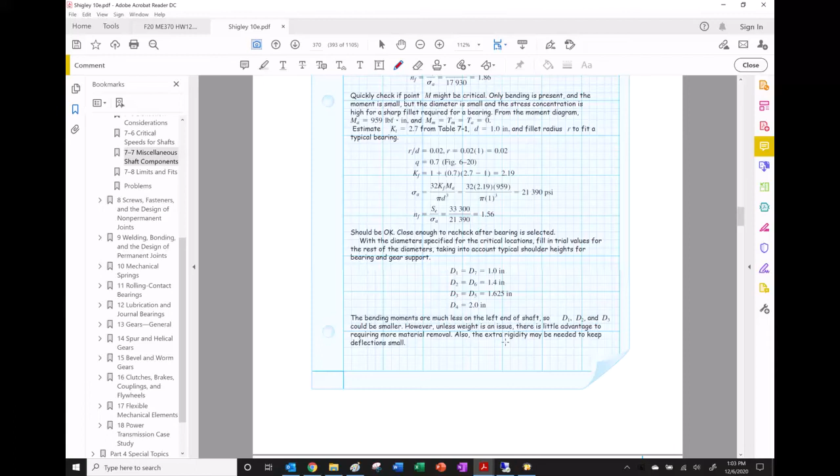Alright, here's a brief video on making the drawings for this homework project. I'm going to base it on example 7.2 in the book. We're making it slightly different because I'm not using retaining rings on this — I didn't feel like covering that.

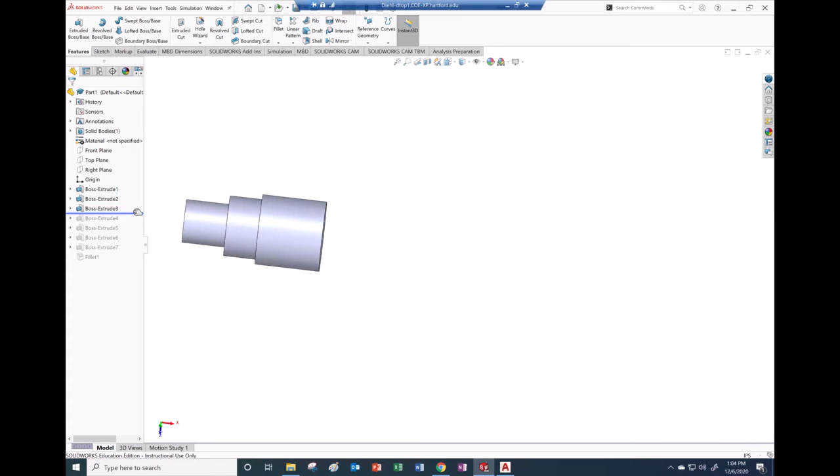So I've made it already in SolidWorks here. I didn't bother with the technique I had alluded to, where I made a bunch of planes. I just started on the right plane and built up one section at a time. But you get the idea. Then I added fillets based on what was in the book, which I think used inches.

Of course, our project is in millimeters. But you can see that the fillet is pretty small right here — they used a 0.02.

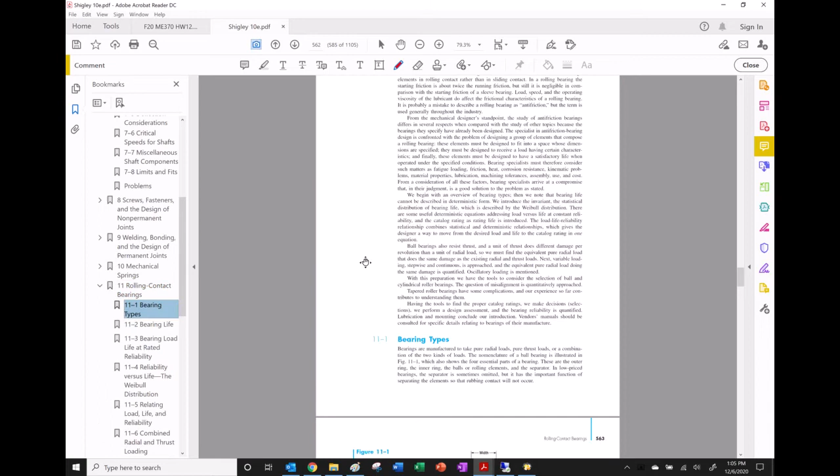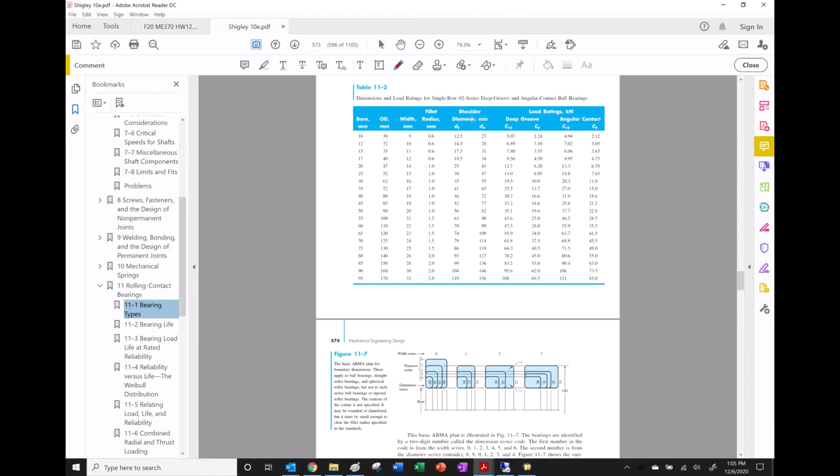And for the bearings, like I said, look up the table here — I think it's table 11.1, or maybe 11.2. I think we have this table right here somewhere. Yeah, there you go. Or is it 11.2? I think it's 11.2, right?

It had these bearings in it, and unfortunately they're in metric right here, and I don't feel like doing the conversion. But right here is a 25 millimeter, which is the same as a 1 inch diameter — 1 inch is 25 millimeters.

Anyway, if you take a look at the angular contact bearing, the C10 rating is 14.8, in kilonewtons. I think it's going to be way larger than... let's see, we've got to go back to this. Yeah, this is running, this is great, isn't it?

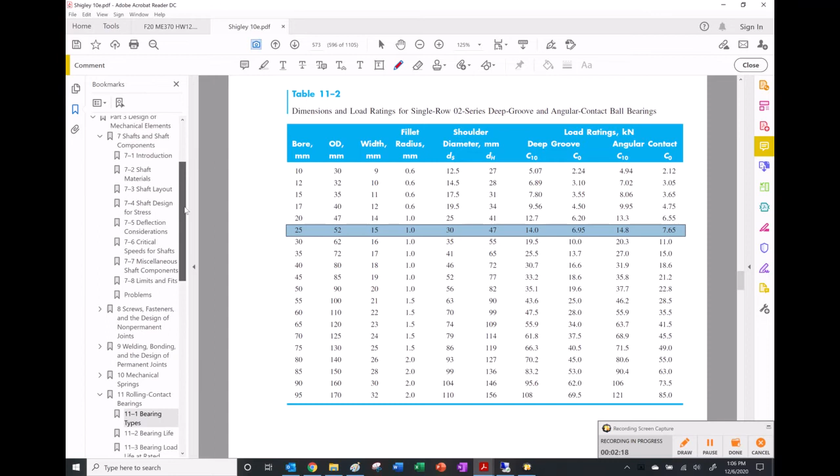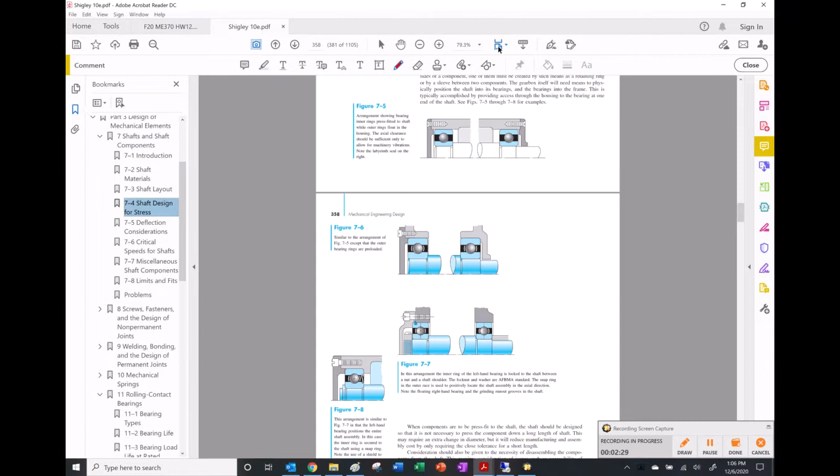Oh boy, let's see — shaft design for stress. I think once you did the statics, which I'm not sure exactly where they're done in this problem, but I think they're shown, right?

If you go back and look at the forces — these two forces — and get the resultant from that, it's the square root of 115 squared plus 356.7 squared. If you turn that into kilonewtons, I'm sure this would be way smaller than the bearing rating.

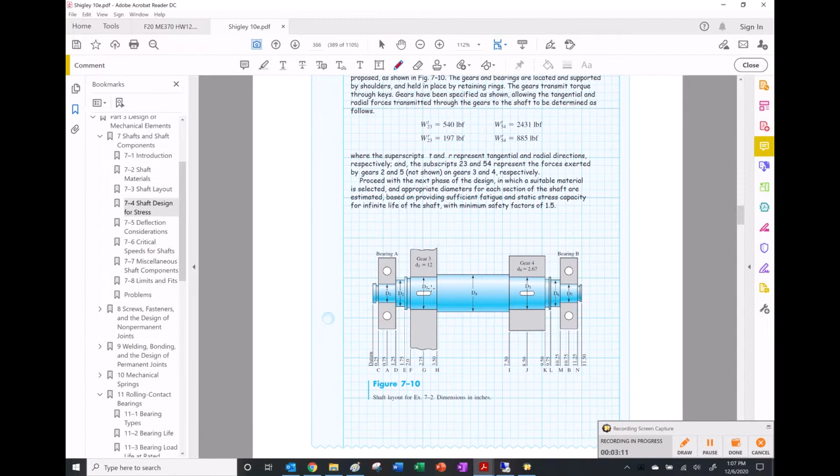But the 1 inch diameter really got chosen based on... trying to get the words out... based on the ratio between D1 and D2 right here.

So anyway, going back to my drawing, I'm going to create a drawing out of this. I think I have to save this first in order to get it in there.

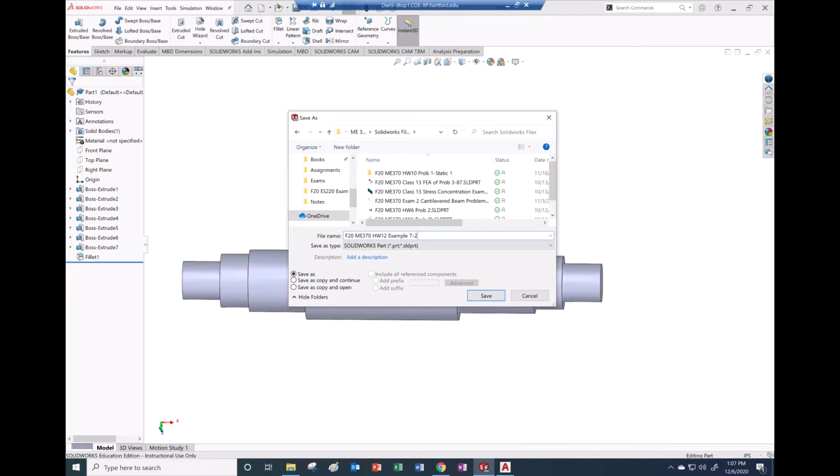Let's see, I'm going to go up to my directory here — I have one called SolidWorks files. I'll go F20, ME370, homework 12, example 7-2. There we go. I'm telling myself this so in the future when I go to look for this file again, I can find it.

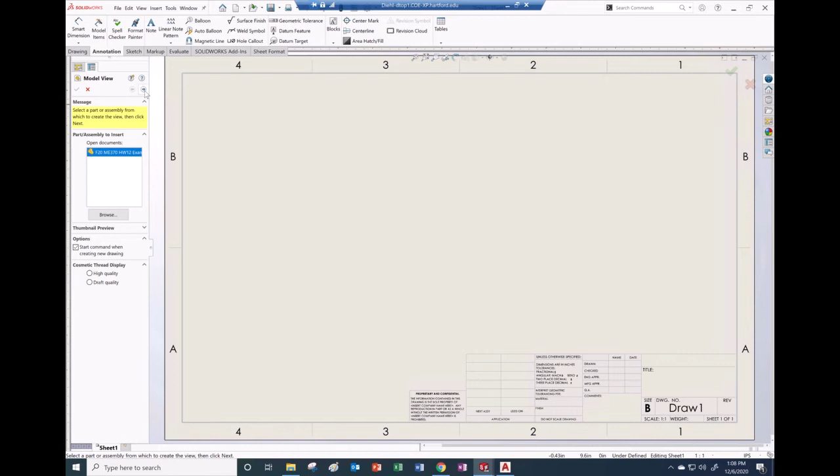Okay, so I want to create a new drawing. I told you to use B size, which is 11 by 17. It's already open in there, so I can just stick the file in.

We really only need one view — the front view, I guess — you don't need the other views. And this doesn't really use the paper all that well, so I will use a custom scale.

I think the better way to do this — I keep forgetting — is to go to sheet and go to properties. Is that right? Yeah, and we could change what the default scale is. Let's make the default 1:1 and apply the changes.

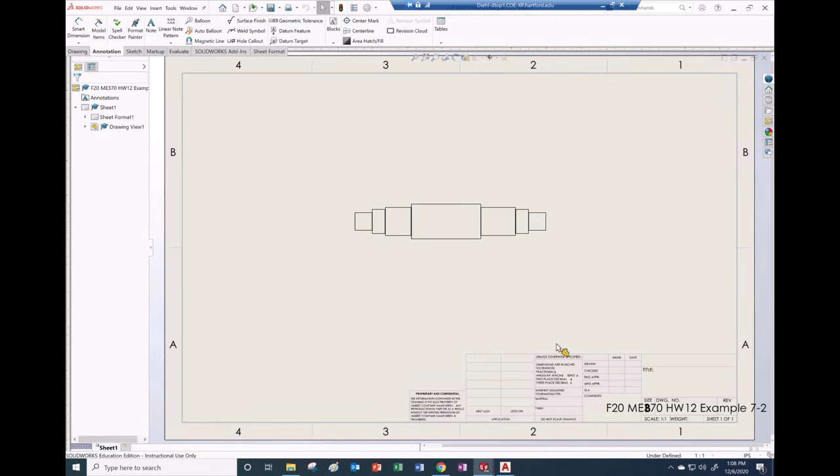I think we might need to rebuild. It says 1 to 1, but that doesn't look like it changed. Oh okay, use sheet scale. There you go, boom. All right, but you might want to change that for yours — you might need to make it bigger to fit into things.

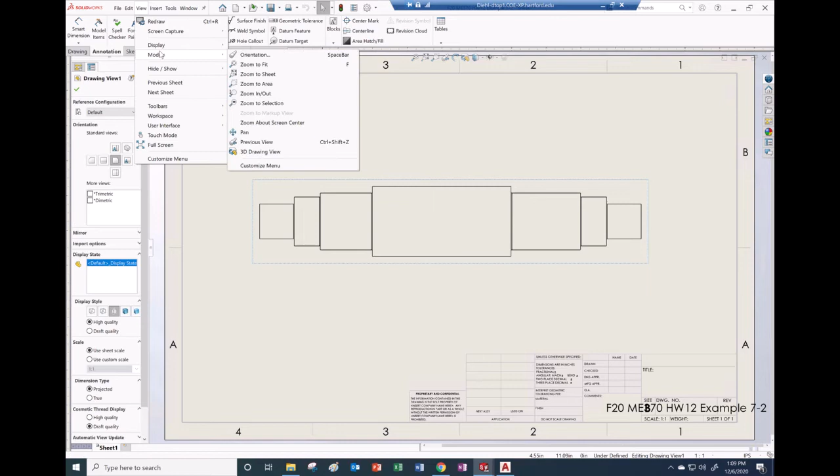There's something in here I like to get rid of because I don't like the way it looks. I go up to display and get rid of — sometimes I put tangent edges with font, or get rid of the tangent edges that are part of that — because you can't really see that. Now you can see the fillets in there, but you can't really see that line. It doesn't really appear in a real shaft.

So let's see, I think I might have to mess around with some stuff here. I was asked about how I put X's right there. I probably shouldn't even have done that, but I'll show you how I did it — I think it was Jason who was asking.

I just went into my sketch right there, and I think I might have had to cheat and go to this line right there instead. And then I did it again here with the center line.

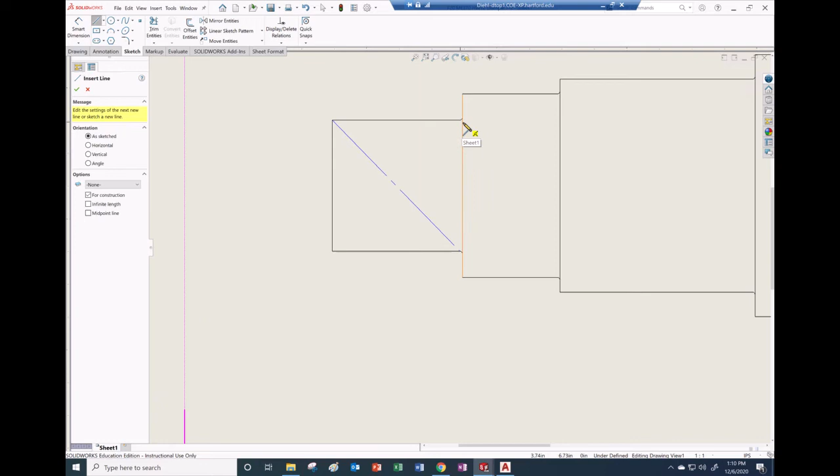This is not necessary to do. I mean, you could convey the thing without doing this, but I liked the way that it looked. So that's what I decided to do.

I think I might need to be careful, if I was going to use this for dimension, because since I took this off the bottom of the fillet instead of doing it all the way, in reality that should be right there, right? Otherwise the center of this is not going to be in the correct spot when you go to make the dimensions onto the thing.

But I think maybe I have just caused more problems by even showing that on my original drawing. I just like the way that it looked, to tell you the truth.

I'm having a hard time getting this thing to grab. But you can see, this is just a graphical thing, right? It's not really a common thing to have those X's on there, but I figured I would show you how to do it. It looks kind of nice.

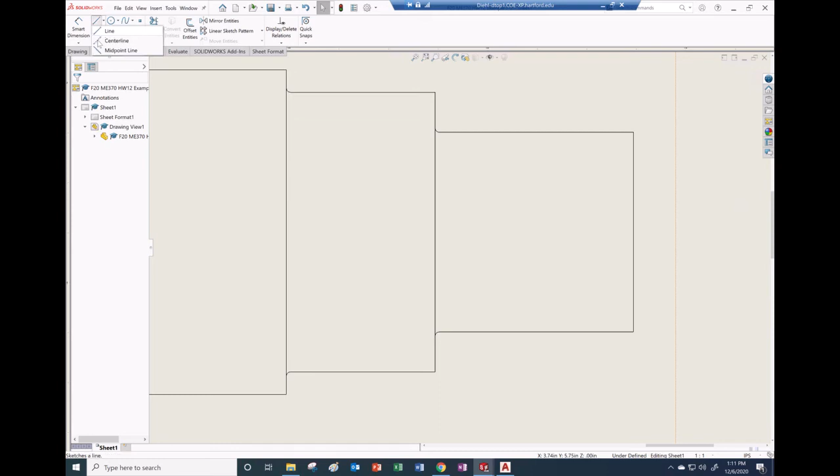A lot of times people want to know where the center of the bearing is. Let's see if I can get this to work, it's not doing the automatic thing. Sometimes you have to touch it onto there. I think that's going to be right.

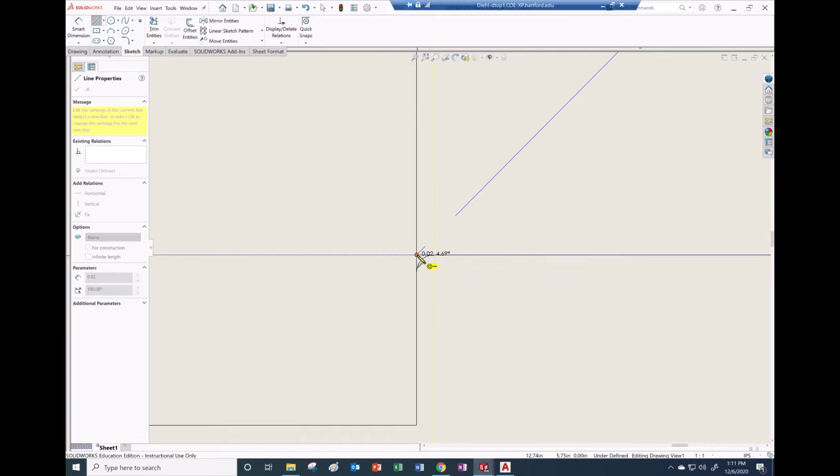Let me double check. See, what I could do if I really wanted to mess with things is I could go from here to there, and then force that to be horizontal, so that it's small enough that nobody's going to even notice it's there, but it's going to force the thing to be where I intended it to be.

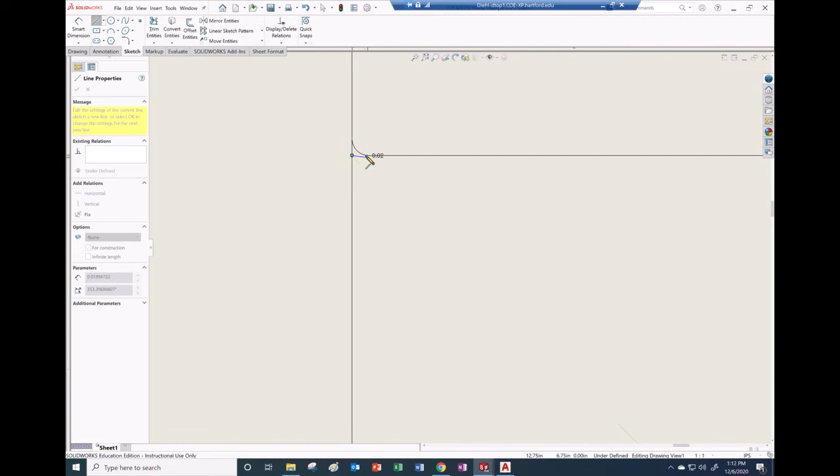So when I go to make a dimension off of it, right, I could have just done that, yeah. And I think that's going to be horizontal. I think it's going to be in the right spot.

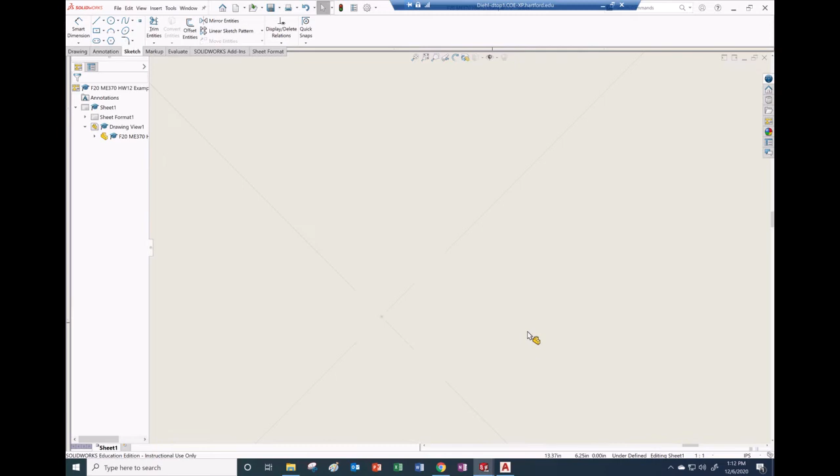When I go to actually make a dimension on this, it'd be nice if those crossed at the same spot right in there. But anyway, I'll go ahead and put a point right in there. It's going to be really small, so you won't be able to see that point placed onto the midpoint right there. But I believe that's going to give me the right dimension. So that right there is a better thing to be making our dimension off of.

So when we go to make a dimension onto this thing, we have 10 inches, right? And that's like the critical dimension because that's how the thing gets put into the machine.

And then when you go to have other dimensions, you want to be careful not to, you might be tempted to do a dimension right here, but of course the fillet's there. So you got to be careful when you're putting the dimension on that you actually go to the correct edge.

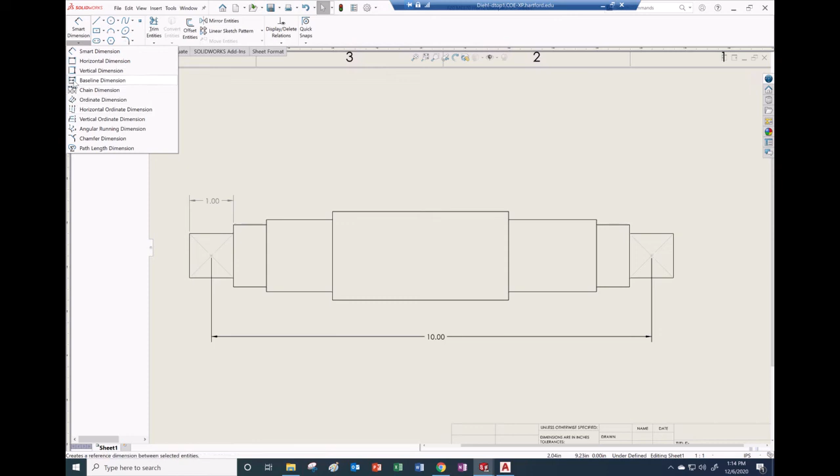Does it know to do this? No, I guess there's another dimensioning thing in here. I think it's horizontal ordinate dimension. You could do that, I think. There might be baseline dimensions, you could use some of these other features. I'm just mentioning them, I don't remember how to use all of them, so I'm not going to right here.

Because I could figure it out, but I'm in the middle of making the video and I don't want to stop and figure the thing out just right now, but this is going to be good enough.

And I'm going to go ahead and break one of the rules that you usually have for dimensioning, and I'm going to go ahead and include all the dimensions in there. A lot of times you don't, but I guess technically I think I have enough information now to be able to build it.

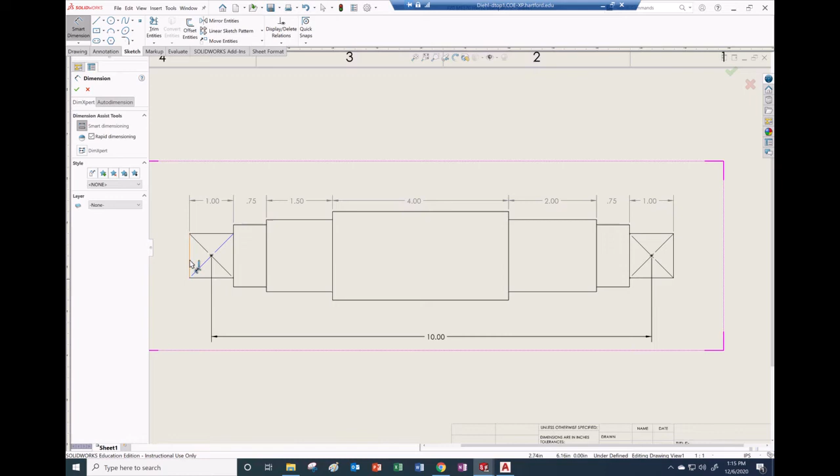And then we want the diameters in there, right? So, right here, put that diameter in here. I don't like the fact that it's going over to the right. It would look better to me if it went over to the left, but I'm gonna leave it right there. And then let's see, go to this.

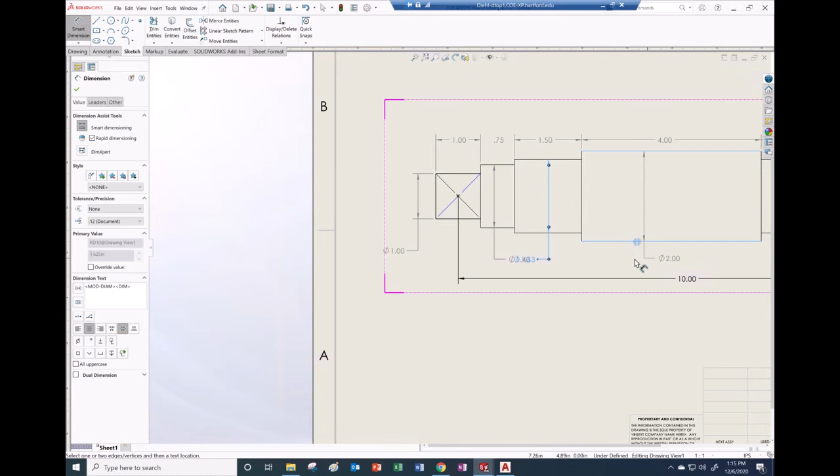And I think we're right here. Oh, well, look at those guys that cross over. I better fix that over there.

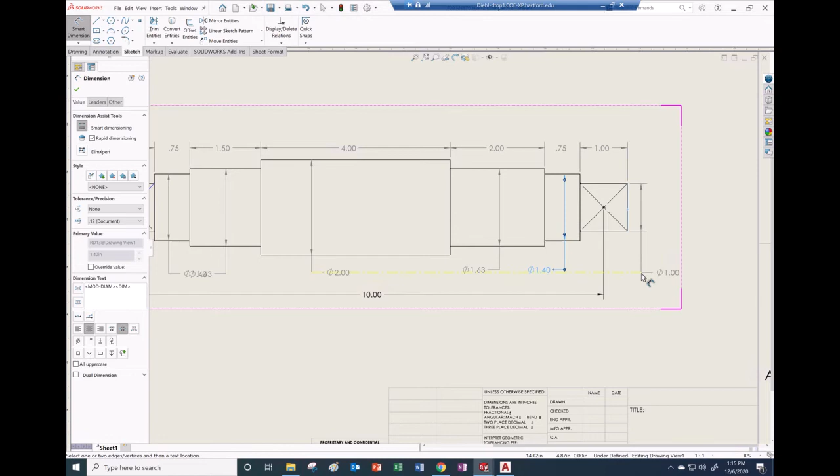All right. Let's see, let me fix this guy. I don't know why he decided to do that. Let me go fix that guy. No. Oh. Dang. Come on.

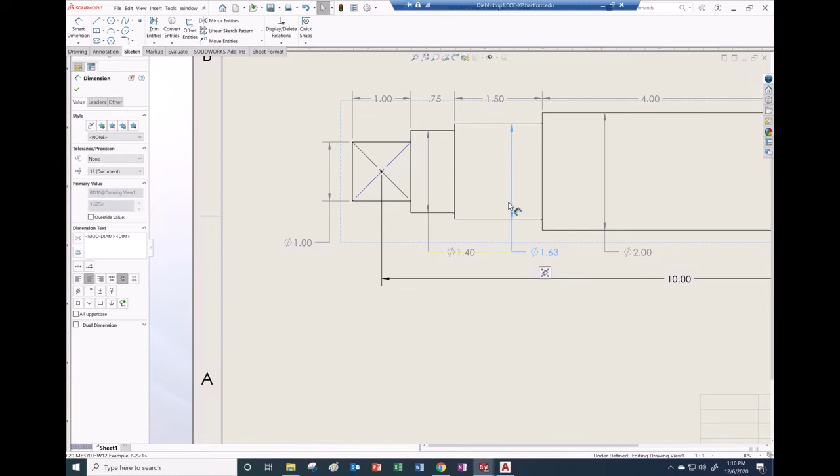I think if I click on that, is where I click on that. Yeah, there you go. All right. Yeah, click on that. Got him to go over to the direction. Yeah, that looks okay, looks pretty good.

Also, okay, so if you want to do a call out, an annotation here, where are we at here? Datum feature, datum here, balloon, linear pattern. Let's see, I think it's a note.

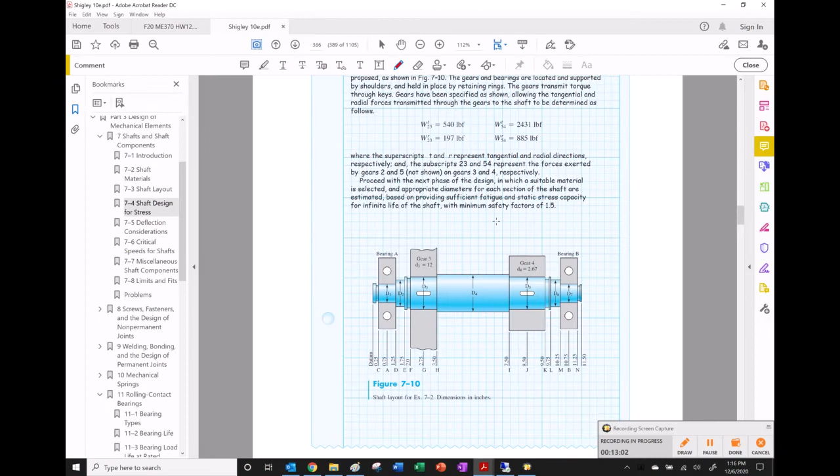I think you come in here and let's see. I'll pick this note right here, and then I will write in capital letters, keyway. Did it tell us what size the keyway was in this? I don't know if it ever actually says what size the keyway is.

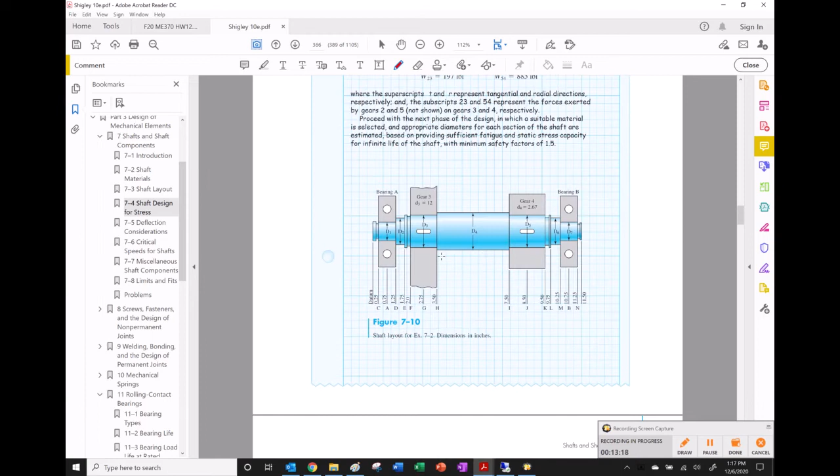I'm not going to read this just now, but what I can do is that I know in the area where there is a keyway, that's going to be D3, and at the end they summarize the diameters, and D3 is 1.625.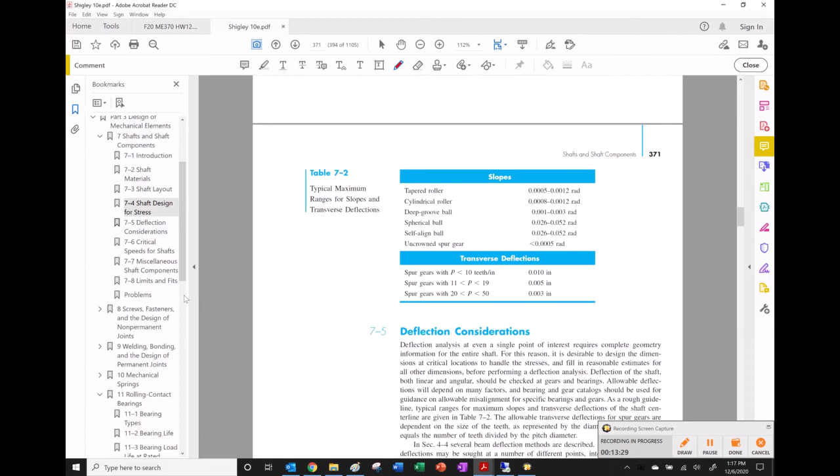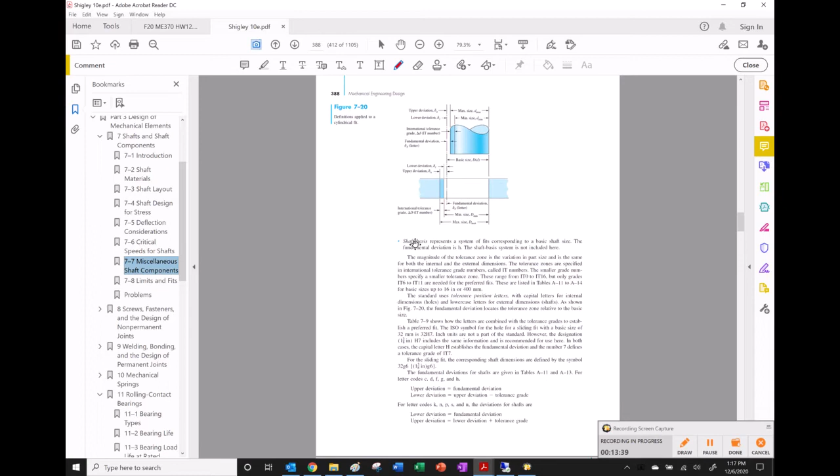So I think that's going to be miscellaneous shaft components, and I tell you somewhere there's a keyway, don't I? No, I think it's table 7.6. Oh yeah, there it is.

All right, so since this is 1.625, which is 1 5/8, right? That would fall under this category, right? Am I right about that? 5/8, yeah, 3/8, and yeah, okay.

And so that's going to have a keyway if we were going to make a square key, and let's go with a square key and have it as 3/8, right? So 3/8 by 3/8 keyway.

So maybe I guess I'm going to go here, 3/8 inch. I usually use lowercase for an x right there. 3/8 inch keyway.

And you could do it again over here, right? And I kind of wish that would go over. I don't like crossing the line, but that's the best I can do right here. Whoops, dang, I wish I had, I meant to. Okay, well, maybe I'll put it down there and then delete it. There you go. Oh, come on.

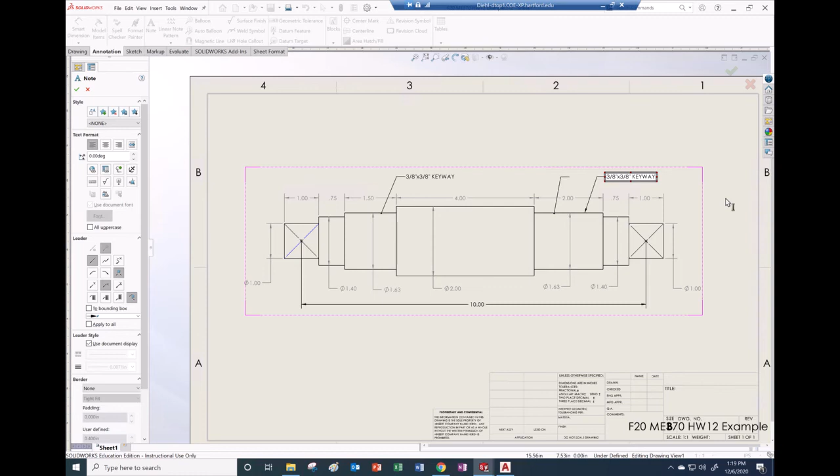All right, I guess I'll be lazy. Somehow I could have saved myself a little time. Just make the video a little longer. Except spelled right away, okay. So you don't actually have to draw, excuse me, the keyway. Because for one thing, actually it kind of messes the thing up a little bit, and it's kind of weird.

They gave me an arrow here, but a dot right there. I guess they think I didn't go to the surface enough. Yeah, okay, if it's on the surface, it'll give an arrow, but if it's on the edge, but if it's on the piece right there, it goes to a dot. That's interesting, kind of like this arrow better.

Gonna hover right over there. There you go. Now don't forget to change the sheet.

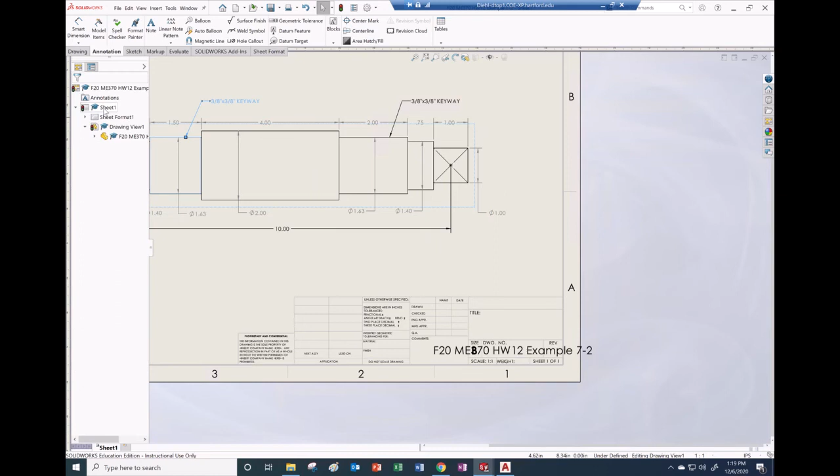So you want to edit sheet format and put all your stuff in here, right? You know, I like this. This is where we would put the company name, but we went to, you're going to the University of Hartford, right? University. Well, spell it right though.

University of Hartford. And that doesn't fit, so let's make it, I think a 16 fits. No, 14 font. There you go.

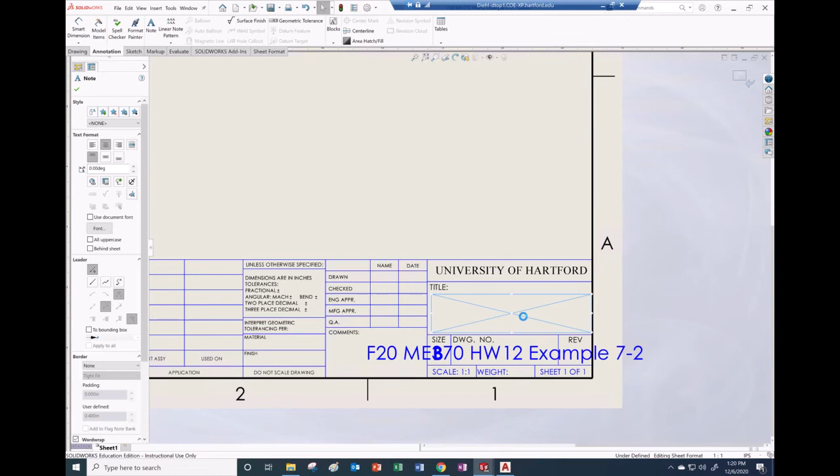Fits pretty well. Make sure you put your name of the project, right? So we might want to, I'm going to put, I like to always say what year it is because I teach this many years. So, and the course number is, and

Project, except spell, wow, doing great today. Project example, and it didn't fit for some reason, and it's not being centered for some reason.

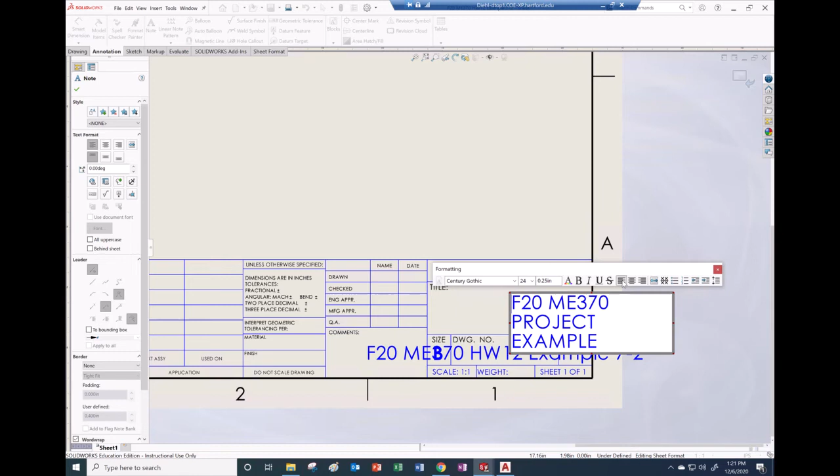I don't get that. Why aren't you centered? Why are you not centered? Oh, that's what it meant by centered. Okay, I don't know why that's not centered. That's really weird. I don't get it, all the other stuff is centered. Why are you doing this?

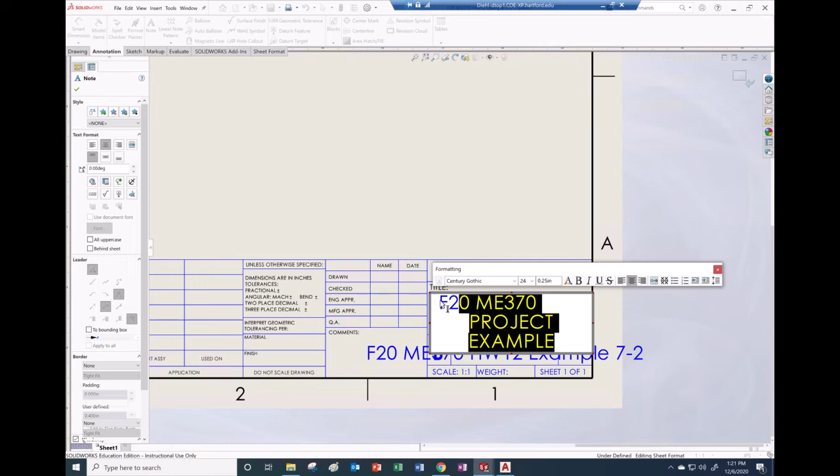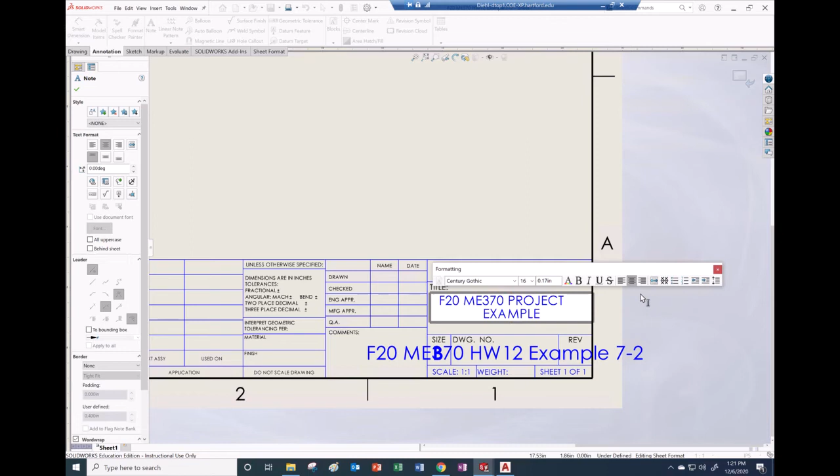All right, maybe let's just change the font down to, there you go. Okay, that looks closer to being centered. I don't quite understand why is that doing that. All right, anyway, and then you know, this doesn't fit, so we want to make sure that we go down to that.

And I think this one, do we control it with this, or do we? I think we have to control it on here. Let's see, does it go? Does 12 fit? Not quite. Make it 10.

Oh, 10 doesn't fit either. 9, yeah, I guess 9 fits. You could just change what the drawing number is, right?

The scale is correct. You might want to put in what the weight is, enter whatever the weight is, because you do know the thing, right? Make sure you put your name on it. That's really important, huh?

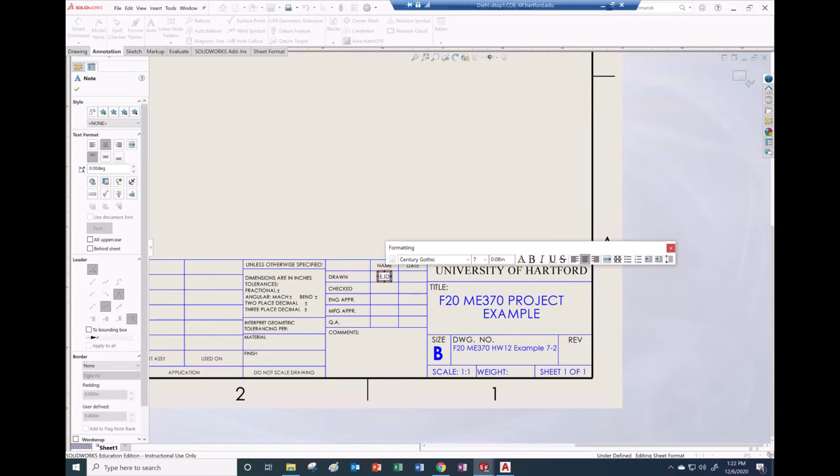EJD, generally we just use initials, at least we did in my company. And whatever today is, 12/6/20, keeping track of the stuff.

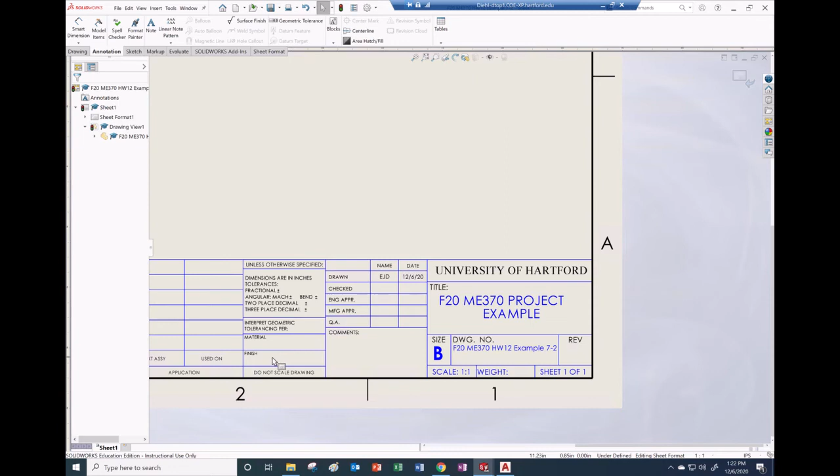Material, we should probably put what the material is. We don't really have the finish, and we don't have the tolerances and that kind of thing. If you're in millimeters, you should change what that thing is, right? I usually get rid of some of this other stuff over here, but it's not hurting anything, so we can just leave it.

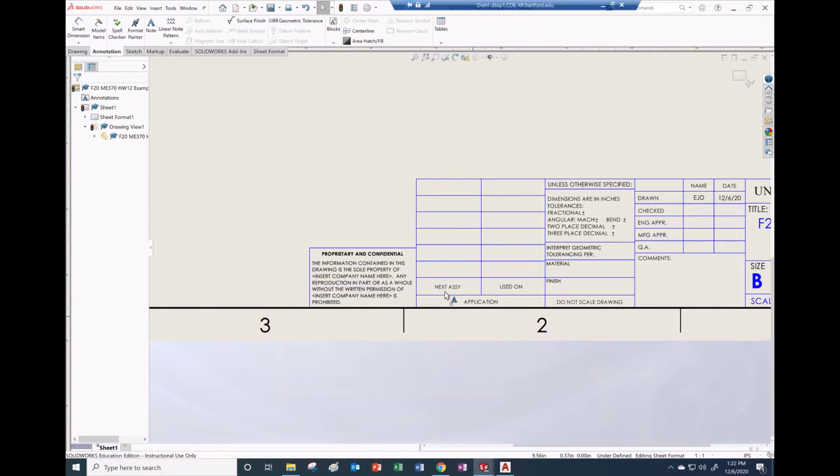So there you go. Now, if you want to print this thing out, by the way, you didn't have to do this thing here, all right, I just emphasize that. You could dimension it in other ways, just as long as you effectively communicate it so it could be built.

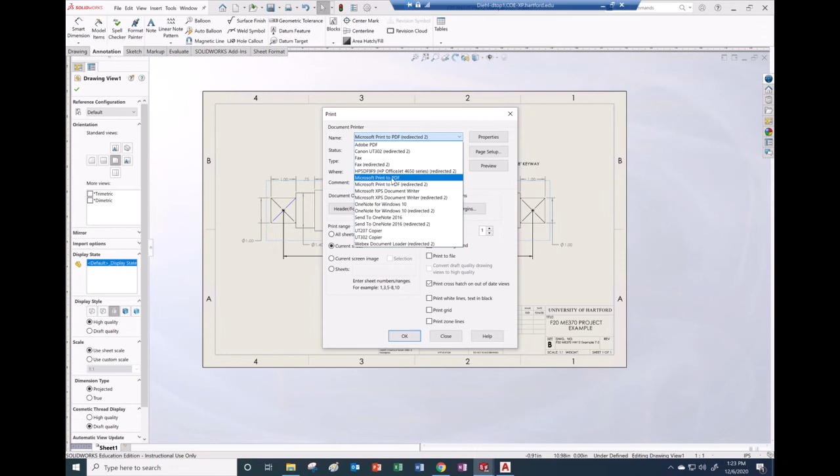So if we want to print this, that's a good idea because some people have a hard time with this. We want to print, I have a print to PDF right here, but we also have Microsoft Print. Make sure you go into properties here, and then you're going to have to go to advanced.

Change the page size to tabloid and hit OK. Make sure you do a print preview, and yes, we got everything going on right here. Now we could just hit print. Okay, hit print, maybe that's the one. Okay, there you go, dummy.

All right, plot that thing out and put this into the correct place. I'll put it into assignments for this one, and I'll write example, except without caps. Example. Kaboom.

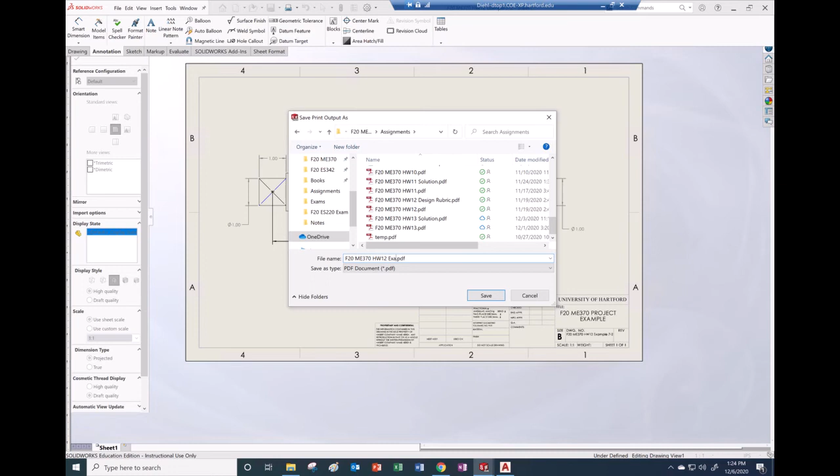Now I also have Adobe on here, so I could have also used the PDF there. Now, I did say that I was going to show the AutoCAD side of this, so I'm going to start a new drawing.

No, I didn't want to do that. I want to come over to homework. And I created a template down here for you, and so I'll open that up.

Okay, so what you want to do, this is called model space. I don't know if that was the way that you learned your stuff in ES220, but this is model space, and if you go to this right here, this is called paper space. Paper space has what's called a viewport, and this viewport is a window into model space.

So let me quickly, briefly draw this thing out. Hopefully I can do it without taking up too much of your time. I already have, I'm going to make some layers here, but I want to make a layer that's specific for the drawing. So I create a shaft layer, and maybe I'll go blue, boom.

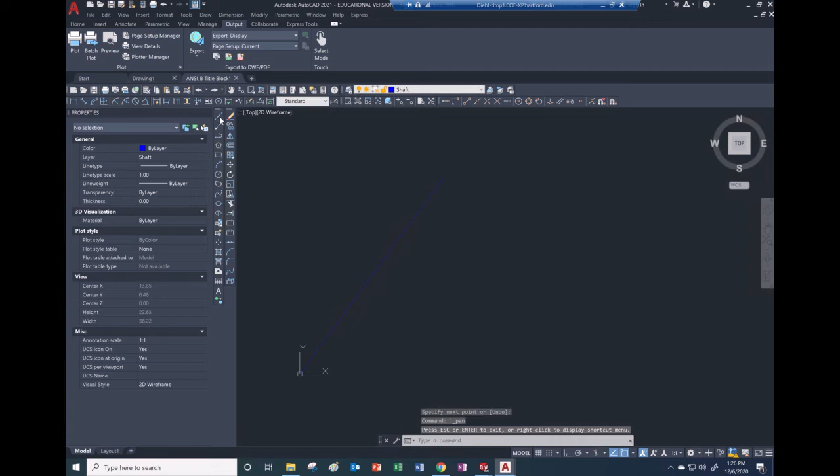And so I'll start another line. I just want to go right to 0, and I'll have my ortho on. And this thing is only about 10 inches, so I'll estimate somewhere right around there. Boom. Get rid of this line.

Make this line, it is going to be a center line, so I'm going to keep this as center. Oh, I don't have one. Okay, I need to create a new layer for center. So we'll create a layer for center.

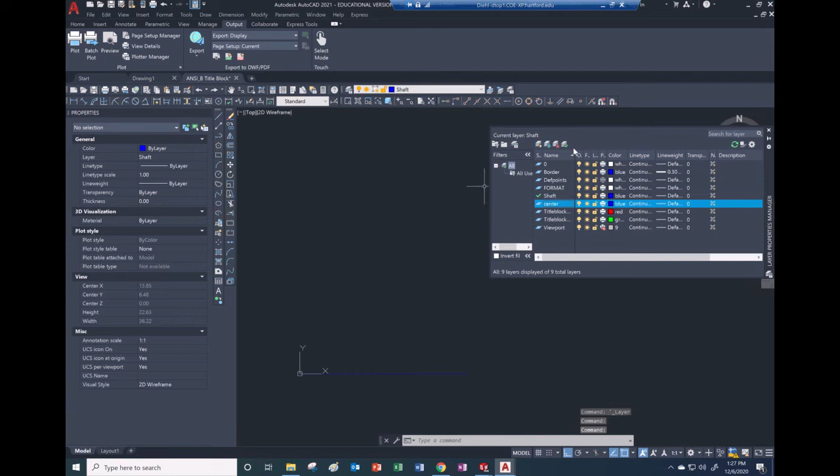And do we have a line type? Yeah, okay, I did put a center as one of those in there. Okay, and I think I like to have a center line that's yellow for some reason. I don't know why, it's just always seemed right.

Well, and I also don't have dimensions, so let me create a new one for dims. And that does not need to be, it's accidentally made that, we'll make that continuous.

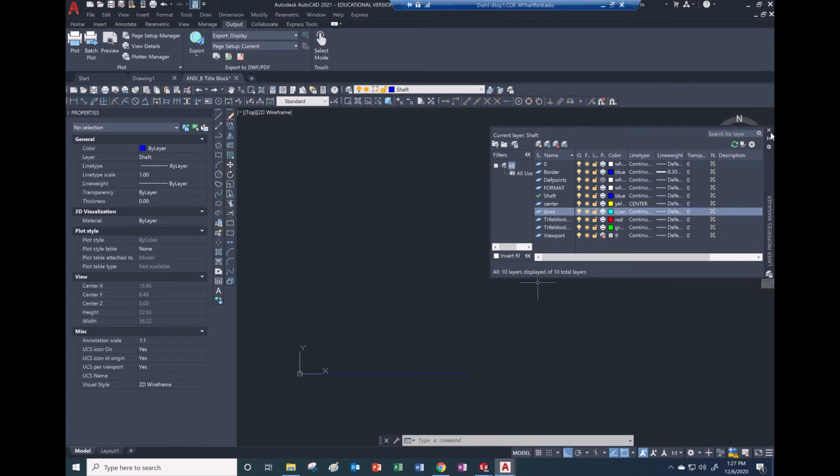Whoops, and then also make this. I like my dimensions to be blue. Why? I don't know, it just seems like a nice color. Cyan, maybe, I think it is.

All right, so I'm going to change this to the center. It'll be a center line. And I'm going to draw, let's see.

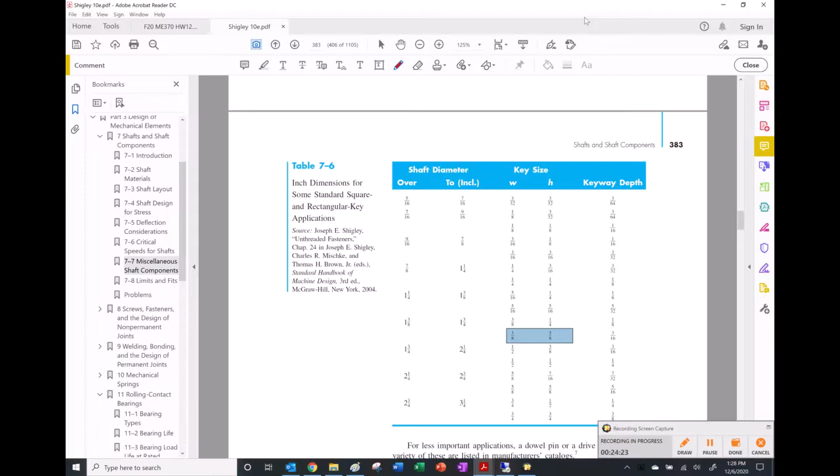And this, I'm cheating and doing all my little cheats and that kind of thing. Okay, so actually I'm going to change that to a center layer, that would make a lot more sense. So that's going to be a shaft right here. So I go back to this right here to look at these different...

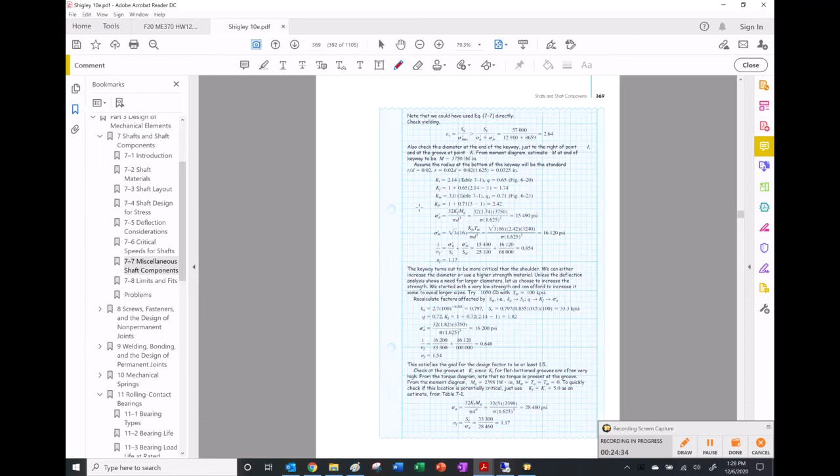Different sizes here, the different lengths. Well, actually I had copy and pasted it over to here, didn't I? Yeah, I did, to figure out where all the lengths were. So I'm ignoring that part right there. So this is going to be 1 inch long, and it's the 1 inch diameter. So this distance is 1 inch. This is 0.75. This is 1.5. So 1 inch, 0.75, 1.5.

So I'm going to offset this line I've just drawn. Let's go 1 inch. Boom. I'll offset again, 0.75. And then I said 1.5, right? You're not there to answer me because I'm talking to myself.

And let's see, keep looking. Now we go, this appears to be 4 inches, and then this is 2 inches. 4 inches, 2 inches, 0.75, and another inch. Okay, see if I can remember all that. 4 inches. 2 inches.

And then 0.75. Oops. 0.75. And then 1 inch. Nope, I forgot to repeat the thing here. 1 inch. All right.

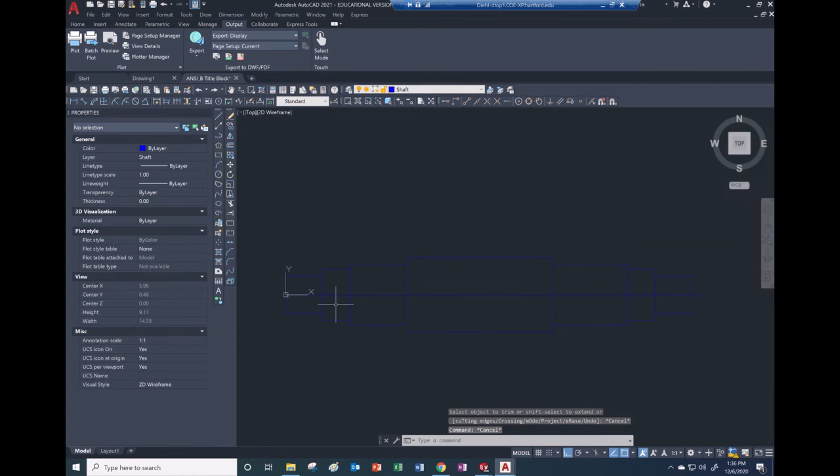I can make this center line right here. Make that the center line. Actually, it would be nicer if this center line were extended a little bit further out. So I'm just going to grab the radio button and move it out to there. That's decent, okay.

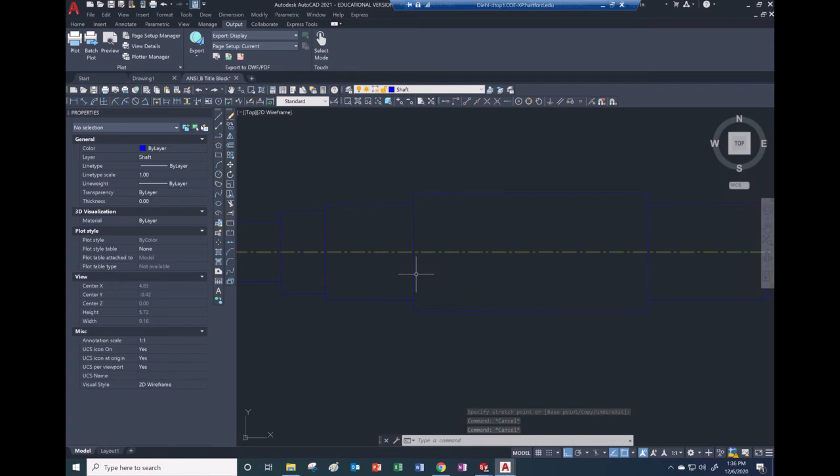Let's see what else I want to do while I'm here. The rest of the stuff I can really do over in paper space. I could put fillets in there if I wanted to, but I'm going to leave it.

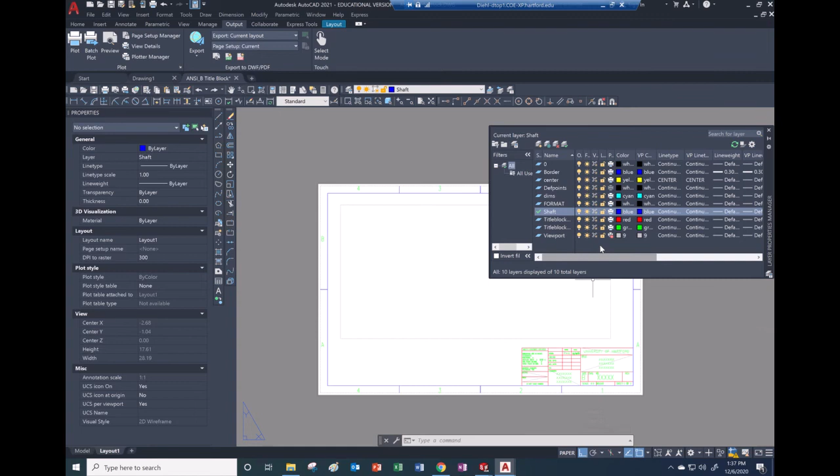So in paper space, I've already created a viewport right here, in a layer I've called VP viewport. Let me go to layers controls. Yeah, that view—see, it's the print. It says the printer is off, so even though you can see the line, it won't show up in the print.

So I'm going to double click inside this viewport. It's like a magic window, and I can zoom in and out right here and get the thing centered. I can move that around. Now I double click back out, and I'm back in paper space. I just select this, and it knows that it's a viewport. It has special properties where you can set a scale.

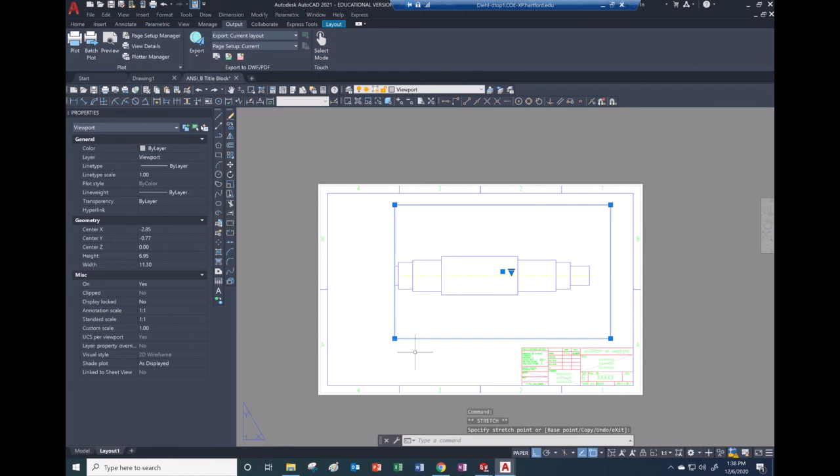So there's already just zooming in and out, we made a scale, but we can drop this down to 1:1. Now we don't want to zoom in and out of this thing anymore, but we can center the page, or we could just move this box. So you can see what happens if I move this box—I can cut the thing off. I don't want to do that.

But now I go to my dimensions, my dims—okay, actually maybe I'm going to go change my layers to center, and I could put those X's that I did into the other one. So what I'm actually drawing, all of this is in paper space, even though it's connecting to something in model space. It's an interesting type of trippy thing—we're in these two different spaces.

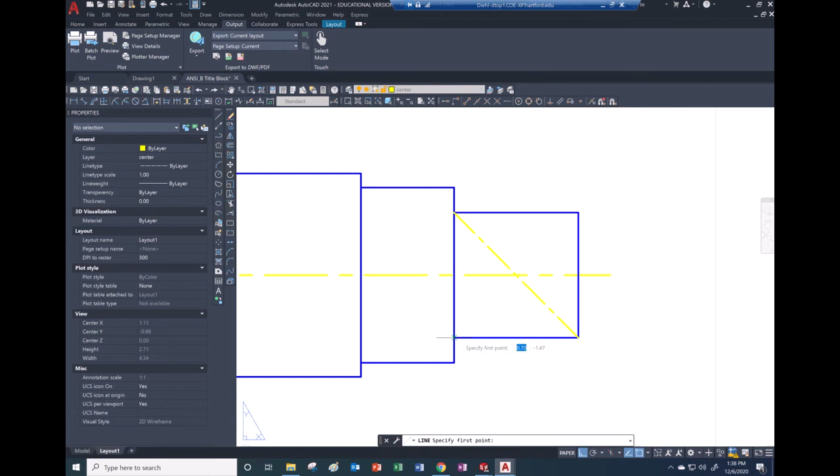But boom, okay, so it snapped to all the right things. Now I want to get my dims. You might want to change what the dim properties are. I changed to my dimensions, and I'll do this horizontally. I go from the center here.

It's actually this yellow doesn't look very good on that white, does it? I'd like to change the background color so I could see this better. I think I can do that in options—I think it even shows up in this little A thing. If you go to options, I don't like the colors.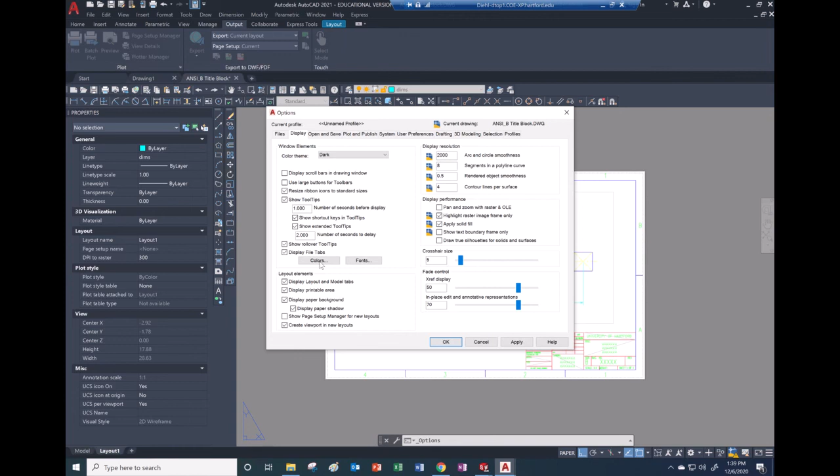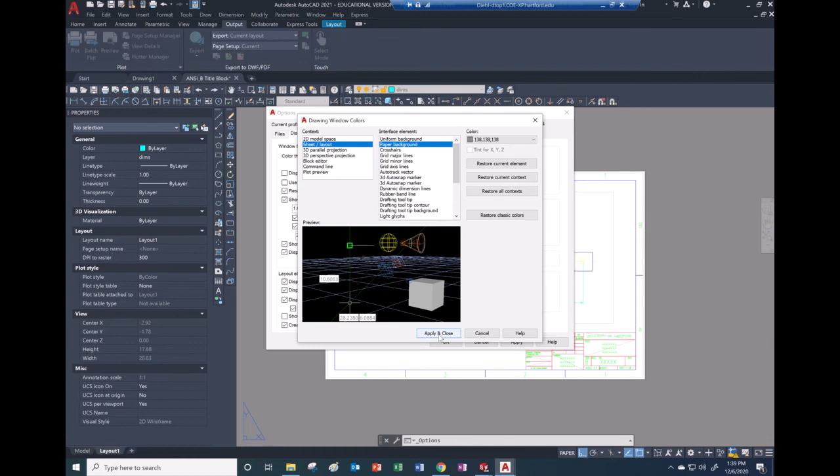Display—there's a theme. I think I just go to this right here. Display paper background—well, that's the behind the thing. Sheet layout, so here, uniform background—let me make it black. Yeah, I like that better. There you go, you can see that a lot better. I think that's the preference a lot of people have.

And then let's see, so here to here, right? And then you can use this feature right here, which I think is a continue—it's just to do this, to do that.

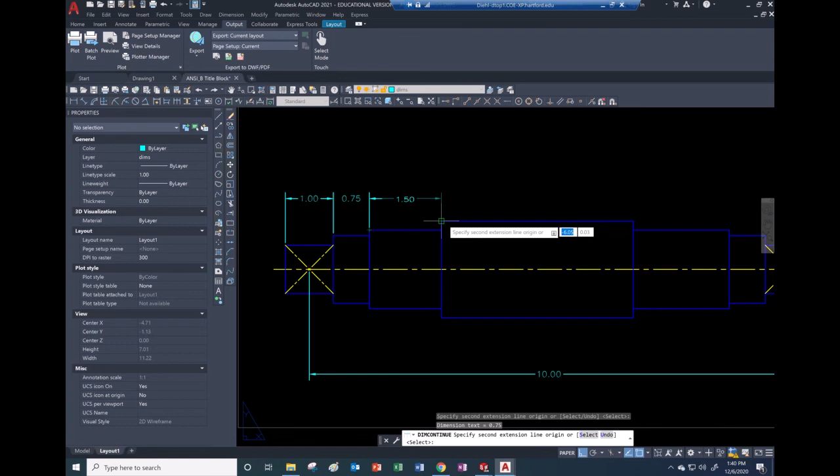Here, here, and here. And then for the diameters, you could call them out if you wanted to, but I think what we're going to do—I'll do this right here, here to here, and then here to here.

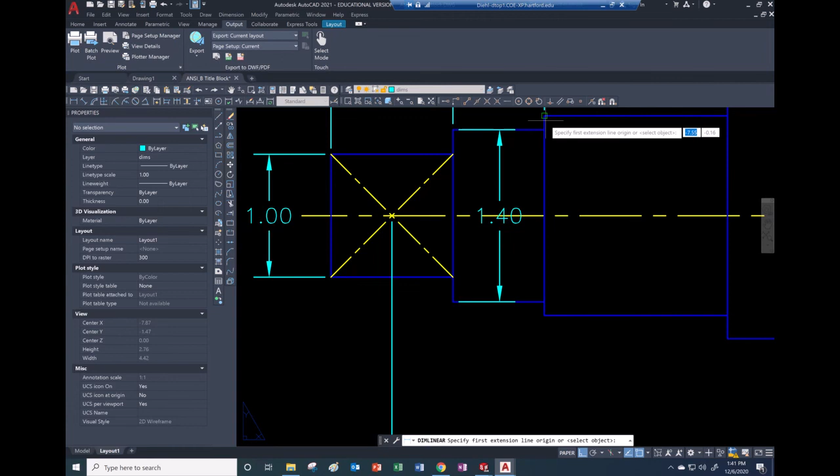I'm going to move that one to the outside here in a second, just so you know. I'm going to wait until I'm done before I do that because it just doesn't look good right there. And with the center line, I think I could just pull these out. But I want to move this over some. You get the idea.

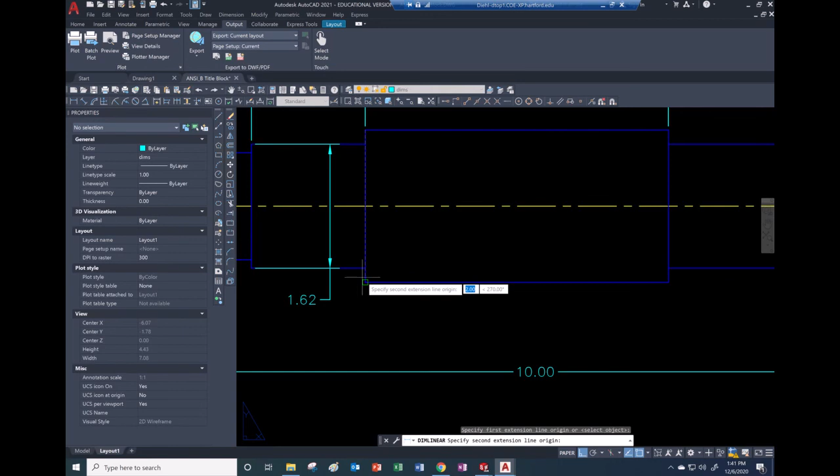I think I'm here, right? And it's kind of better to change the number of decimal places, I believe, and not let it round things off. Shouldn't that round off to 1.625? I think I might have messed up the size of that, did I? I don't know.

Alright, so it doesn't look right—I'm going to move this over. Boom. Sure, and that's fine.

So what we should do as part of these—alright, so I think this actually is going to need to move out some, out to there. Should put the diameter symbol in there. So let me see, there's a way to do this. I'm looking for it—where are you? There's like an override thing in the text.

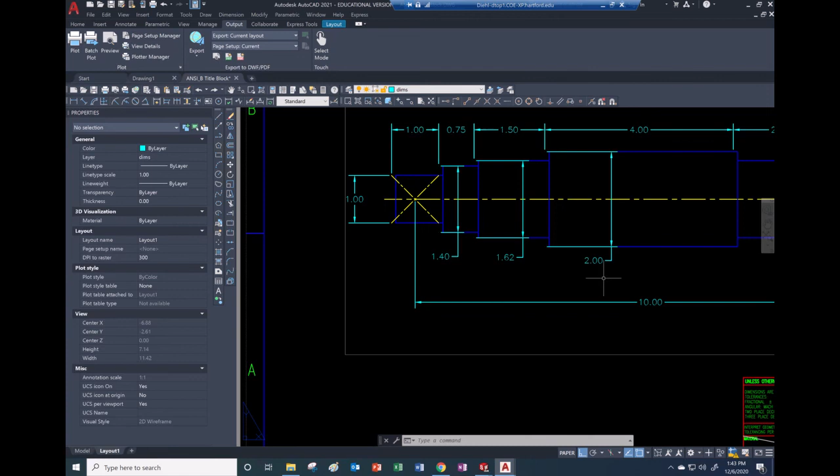Text override? I don't remember how to do it now. Oh, no, I don't want to do that. I'm back in paper space. I'm back in model space. I'm trying to remember how to put the diameter symbol in there. I don't remember, it's been a long time. I guess we're leaving it out.

Anyway, I have all this other text for you to change, and these little lines will disappear. Maybe we could actually just delete them, but they're in the viewport layer, so we could delete them. Put in comments - you should get rid of this stuff if you're not going to put in any comments.

But you could put in what the material is. I don't know if it says material. Oh, there is material right there. I deleted that just a second ago - I shouldn't have deleted it. We could take some text.

Let's borrow this text right there, copy it from the midpoint of that and put it to the midpoint of there. We're going to leave the finish alone. But anyway, you could just double click on that, all right.

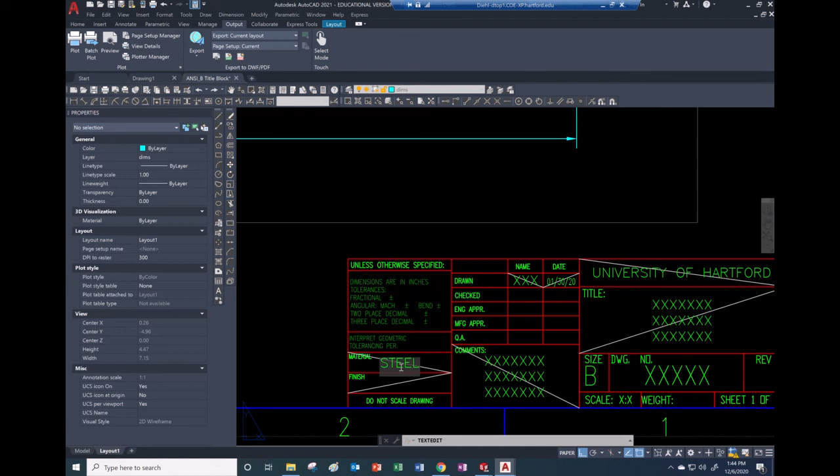All caps, steel. Tell them what steel it is, right? But put all the other stuff into there, and then you could plot this as well.

So let's pretend that we did all of that, and let's plot and make sure that we're in the paper space. I'm using Adobe PDF - let's go for the one that you probably have for the printer, which is going to be Microsoft Print to PDF.

Make it check, okay, so I do have the right - it looks like 11x17 right here, but double check on there. And as you're coming into user preferences, custom page size, no, modify page size - you just want to double check that you have the right page size.

Double check on that. All right, is it custom print size portrait? Let's go landscape, advanced, tabloid, right? So you have tabloid is the answer.

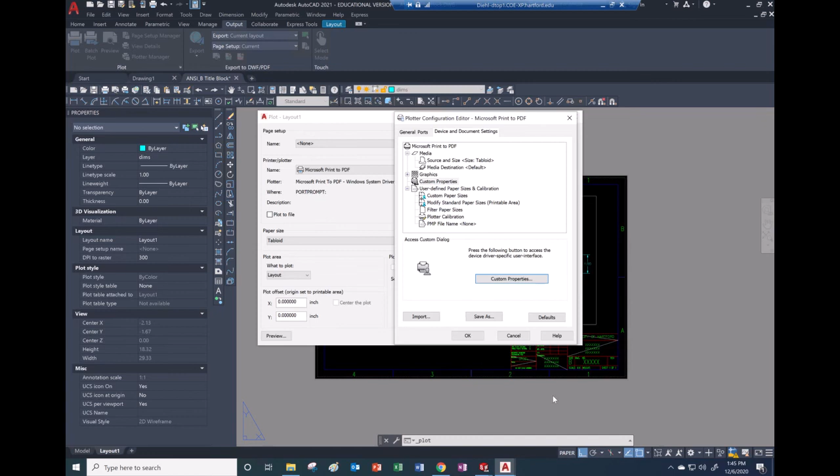Say okay, no, save the change, create a temporary PC3. Sure, why not. All right, so you could save these and organize them if you wanted to. For the pen table assignments, make sure you go monochrome, and make sure you do a print preview.

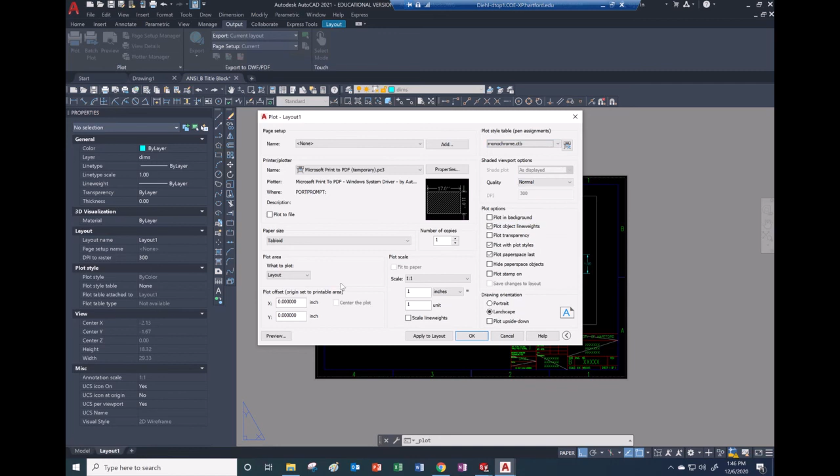And you can see that's a nice looking plot right there. So we will go back - I think it's there, go back into this - and we plotted here. And let me go up to my assignments, and I will make it, this is example in AutoCAD, right? Boom.

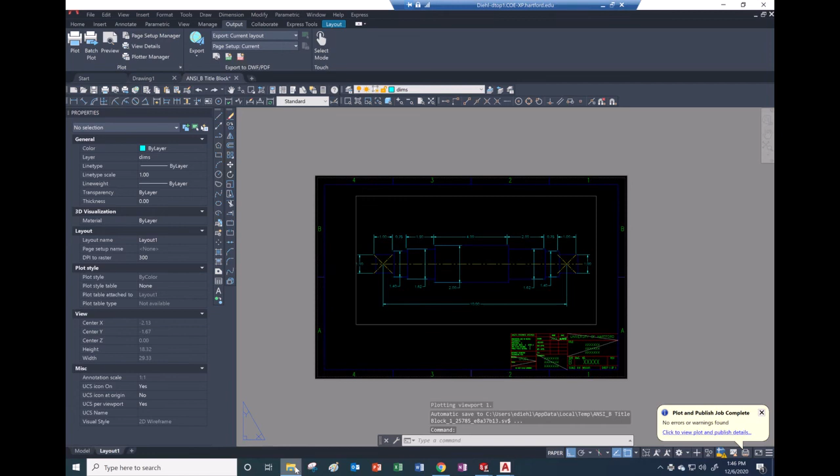And if we go back to check these out, let's see, did it make it? No, it didn't make it. Let's go check out - it's in fall 2 here, and assignments. Let's make sure that they look good.

All right, we have one, it was done in AutoCAD, it looks nice. And we have one that was done in SolidWorks - yeah, looks a little different, right? They're not identical, some of the line weights are off.

Ooh, I accidentally shifted something. It looks like there, yeah, I messed something up. So I definitely want to - I think what I did, unfortunately here was, nope, I need to go back to AutoCAD, don't I? I think I accidentally shifted everything in my model space, unfortunately.

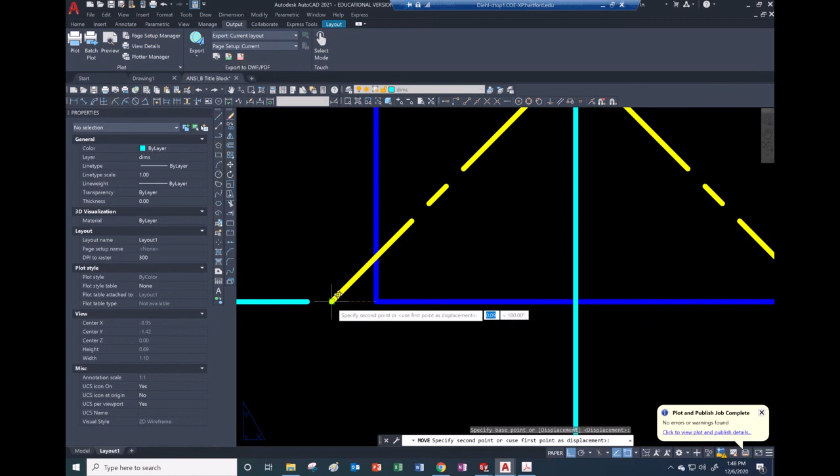But what I could do is, I don't think the zoom changed, right? It's 1-to-1. What I can do is actually pick that point and move it back over to that point, so everything should match up now. Yeah, that was unfortunate, but anyway, I got it to move.

So let me get out of these - no, I already closed it. Okay, good, so I can plot it again. So I plot, it should be fine.

Oh, nope, unfortunately it didn't save the plotter - it didn't save the plotter changes that I made. I should have changed it to here, change it to there again. I think it's custom there. Change it to landscape - I like the results to be in landscape instead of being sideways. There it goes, it's tabloid, so it would have been okay.

Yeah, I've saved it to the file this time, so it should come out. Make sure we do the pen assignments - you could double check and see what happens. There's a preview right there, right? You can see it has all these colors.

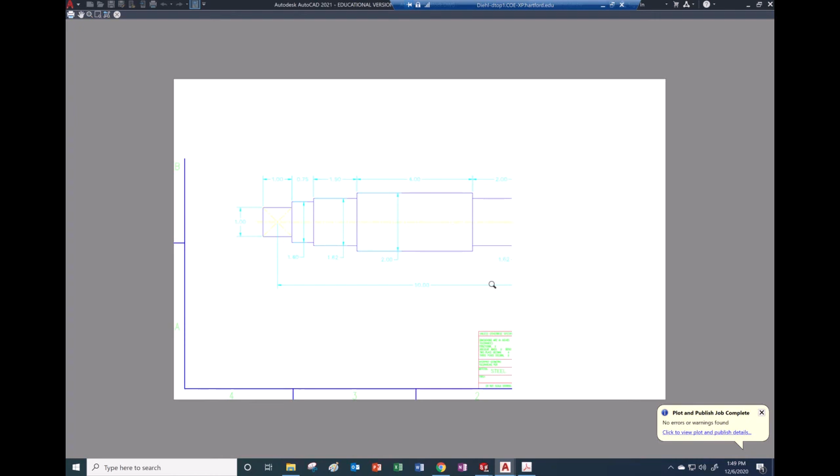Oh, and it's got the wrong sheet layout - oh, I gotta fix that. Okay, so let me go back and fix that. We want the pen assignments to be monochrome, but we needed to fix something else. Let me double check on that preview again. Oh okay, no, it showed up.

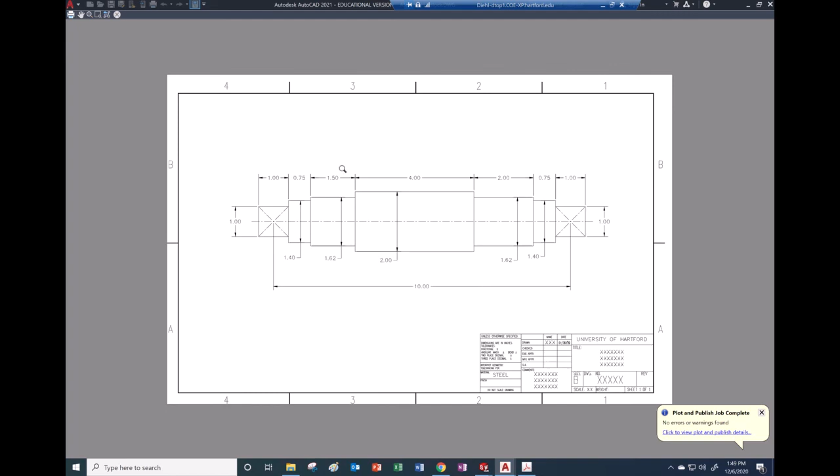It was weird how it didn't show up the whole page, but anyway, we're good to go now. I fixed it - see, it's good to double check stuff, right?

All right, let's double check what it looks like. Here's our AutoCAD. Boom. All right, and I should have changed the drawing number and the title and put my name in there and all those other things. So that's what we have.